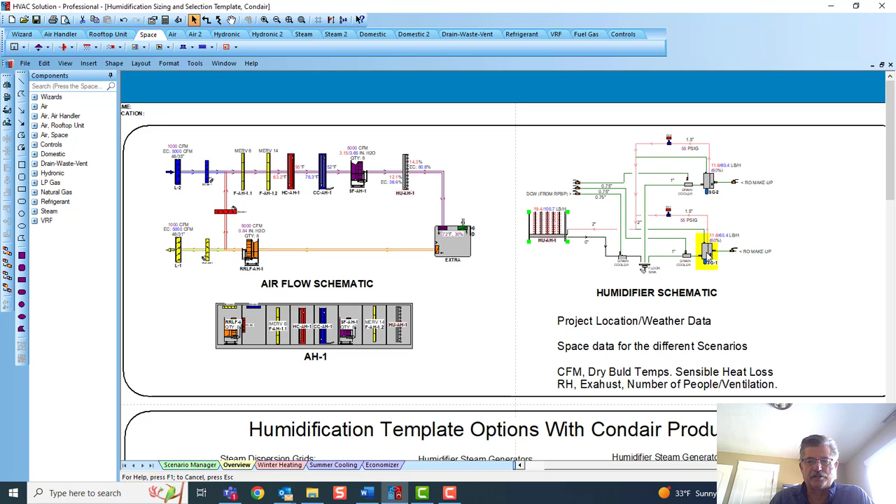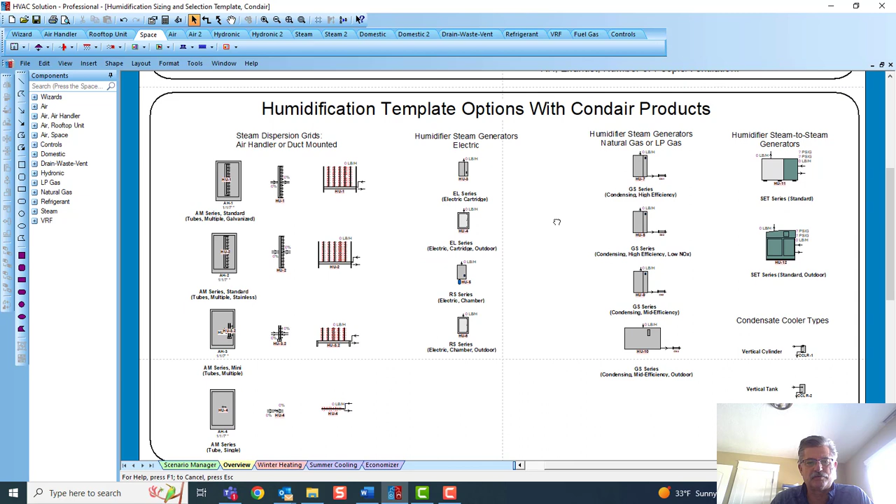Now, all these components right here, let me just scroll up here. We have added humidification template options with Condair products. So you can see we've got their little dispersion grids, the AM series galvanized, and then stainless AM, multiple tubes, and then a single tube. Then obviously there's the component that goes in the airflow, and then the schematic there, the steam schematic.

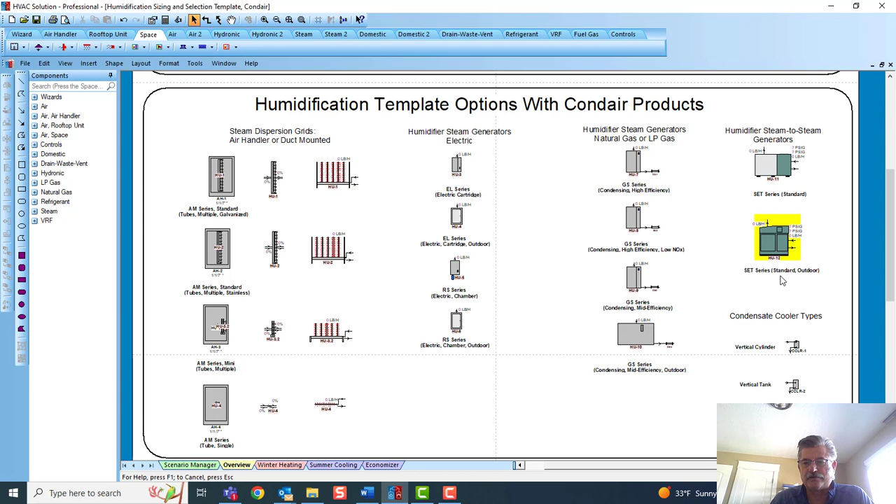Then we also have the humidifier steam generators, the EL series as well as the RS series, and then the natural gas or propane steam generators, GS series there, and then they do have a steam-to-steam generator with the SET series, standard or an outdoor unit. So all these components can be put in the software.

Let's just go to the air. There would be the components, steam. You see there's other types of humidification, pressure washers, Condair, and then there's the dispersion. Then over on the Steam 2 tab is where a lot of the electric or natural gas are, and then right next to that, the Condair steam to steam.

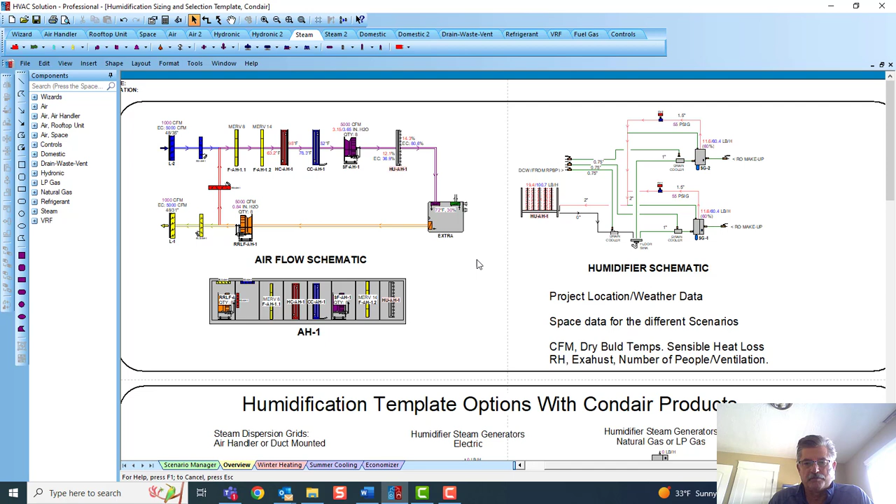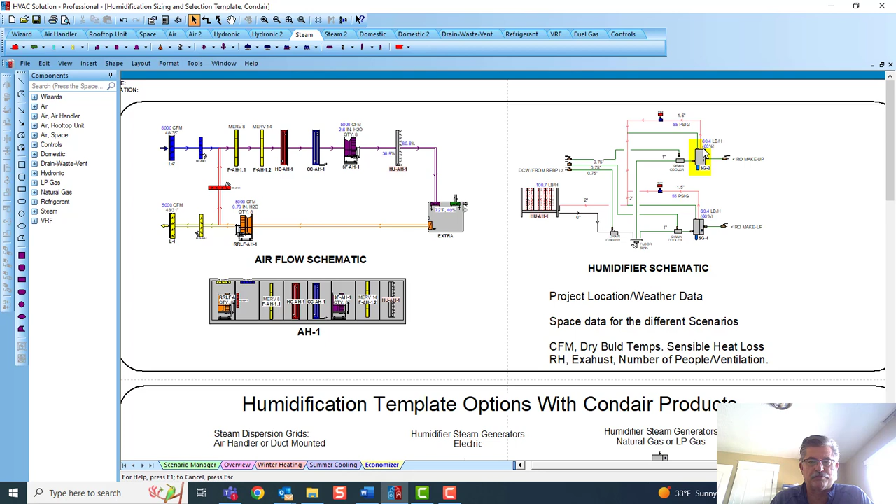So what you need to put in the program, and like I say, this is a template, but you need to put in the project location, which is kind of the weather data. I'm here in St. George, Utah today, the location. And then you also need to put in space data, right? And you'll see we have different scenarios down here: winter heating, summer cooling, then economizer. And you can see as I rotated through those, we had different loads appear.

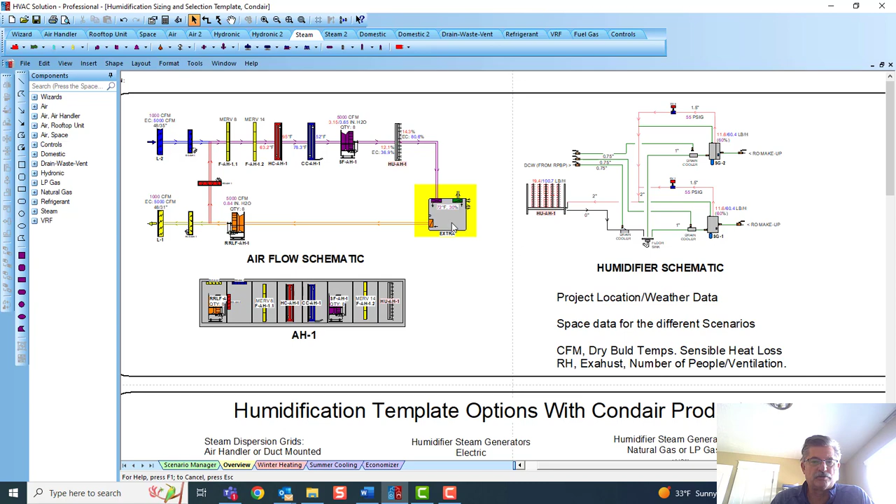So the data that you put in under each scenario, you can put in different CFM, dry bulb, exhaust, ventilation, and you can do that easily by just going into the space. And if you're on the overview tab down here at the bottom, you can go from winter heating to summer cooling to economizer, and you'll see down below the data changes, and you can change that CFM and other related data that's associated with that.

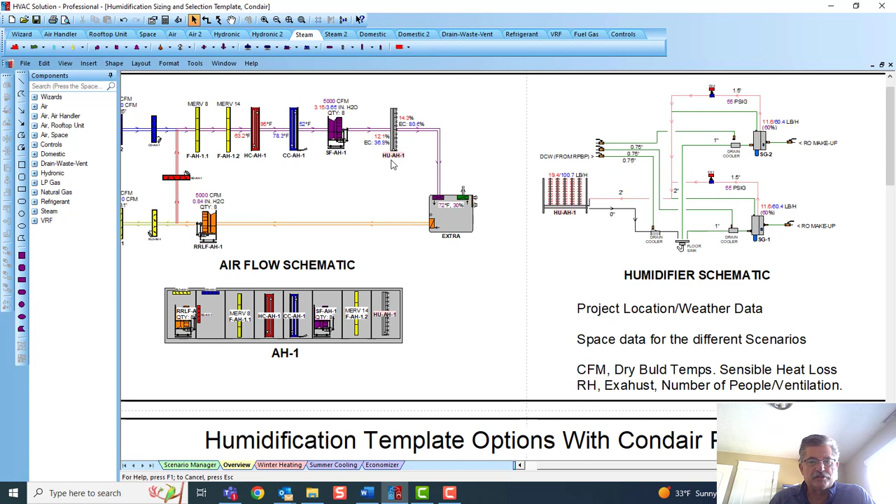So you'll see there's a little pink shading behind the callout. That means I can select the product. So if I hit the thumbs up button, then it'll actually select the product. It's done the calculations based on economizer air 5000 CFM, or the ventilation air under cooling would be 1000 CFM. That would be the heating CFM too on the winter heating.

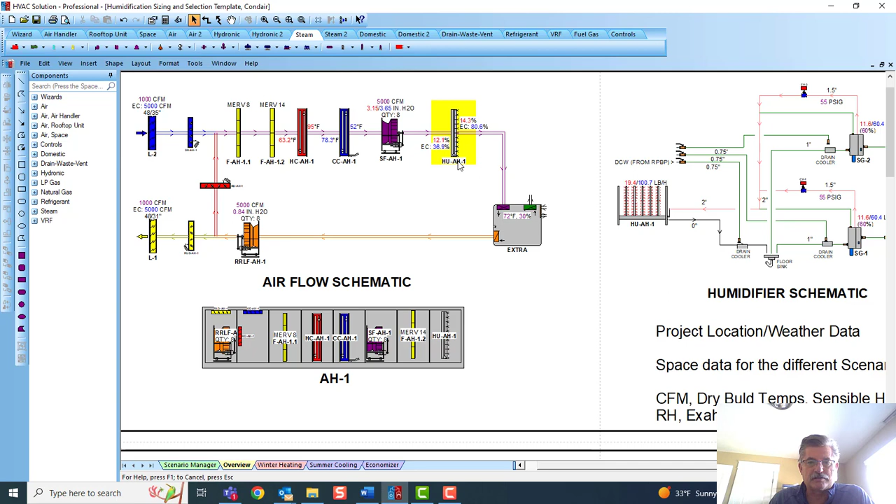So now that it's selected that, I can just click on the humidifier there and go under selection, and then it says which dispersion tube and how much unused capacity. So I could actually go to something else there, the dimensions and weights associated with that. And then associated with that would have been the generator.

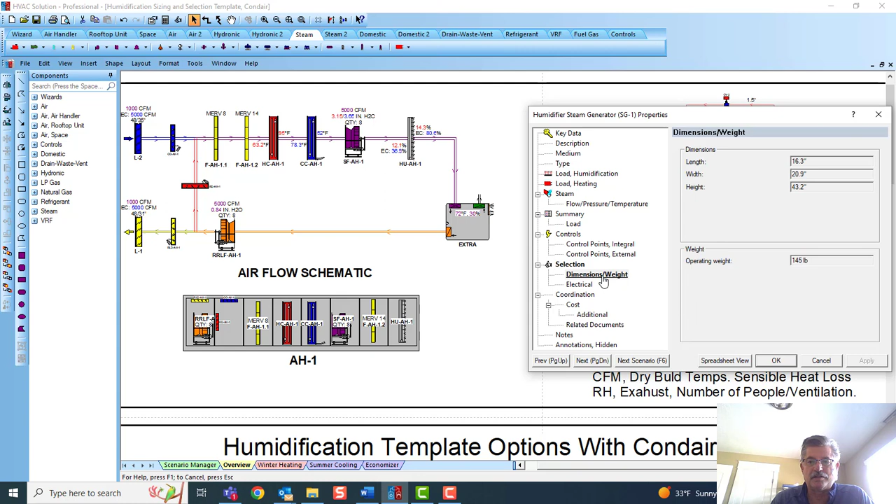This is a humidifier generator, electric. So the RS065 is 4% unused capacity, and the other one would be 36. Once again, dimensions and weights and electrical. All that would be scheduled in the schedules along with the electrical coordination file.

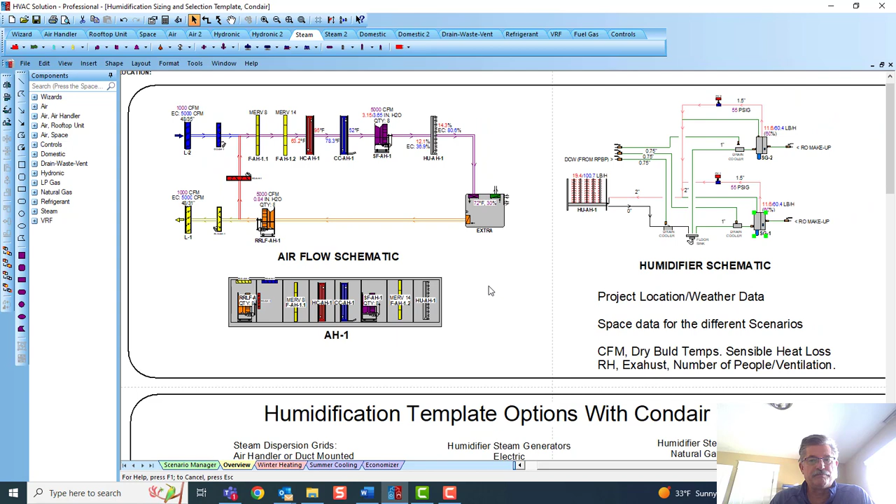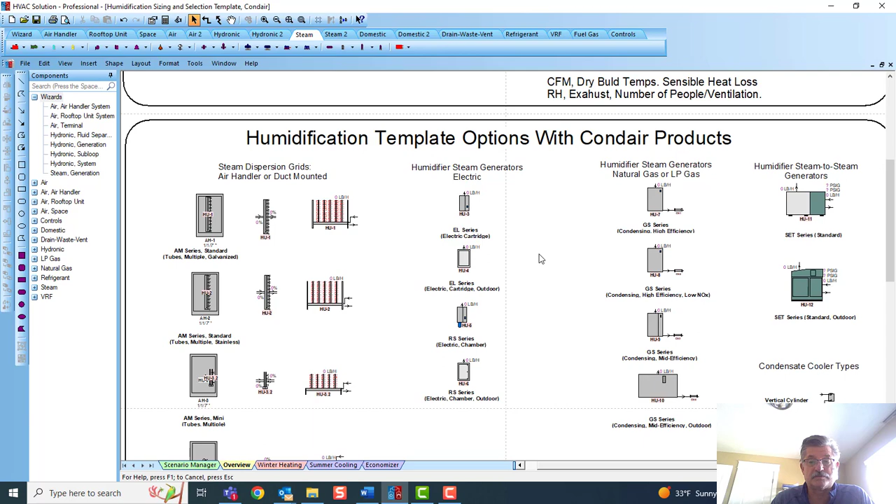Now this system right here can also be created by going to our wizard, either the air handler or the rooftop unit wizard down below here on the project. And once again, if you'd like this, I can just send you this project, and then you can have this to work from as well and build your own templates from this. But here's an example of the rooftop unit that was built with the humidifier in that as well. And then once again, the space data is all put within the space there.

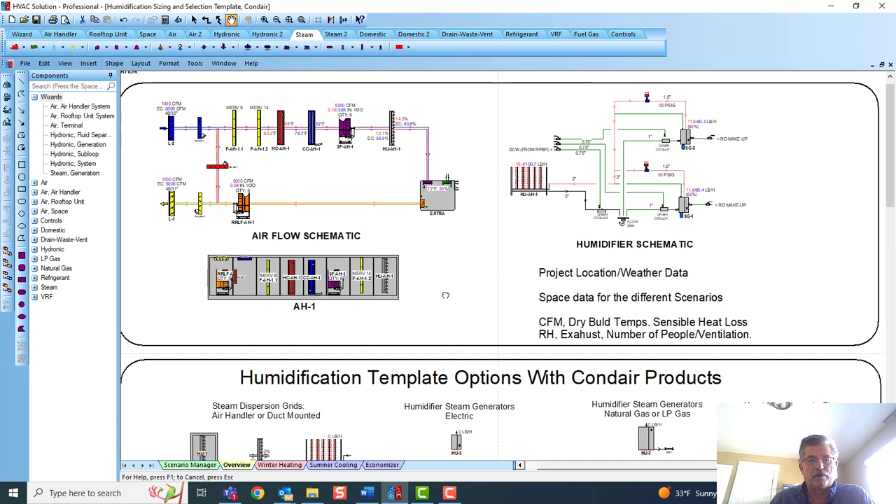So one other thing I'd like to share, and it's not just the humidifier component, but any component you can click on and go under type. So I could switch from the multiple galvanized AM series tube to the single tube. As I do that and hit OK, you'll see the diagram up here, because now there's going to be a single tube in the air handler, and then a smaller one here.

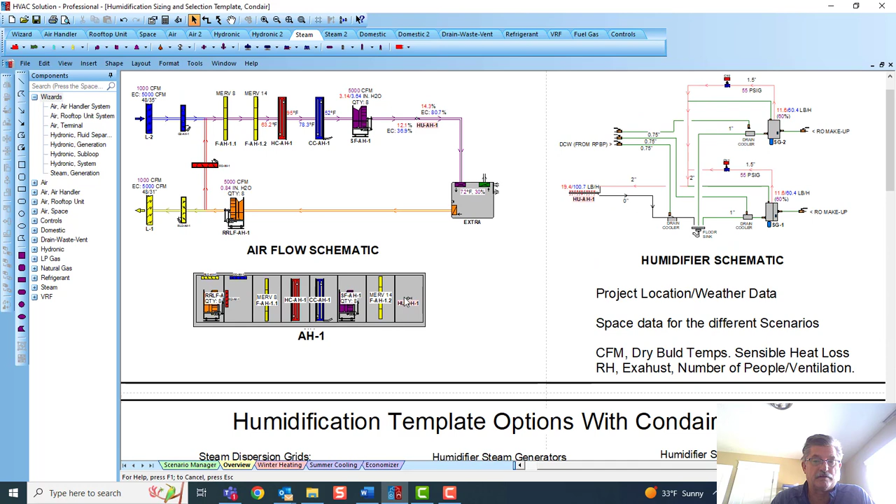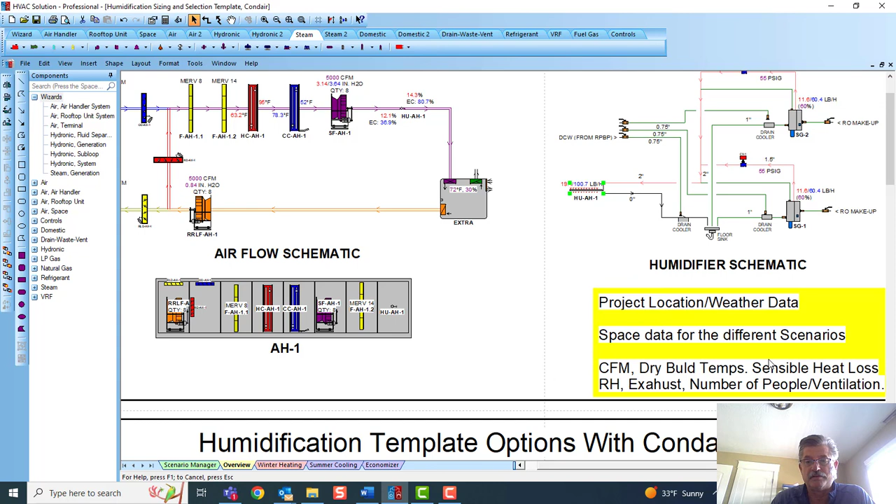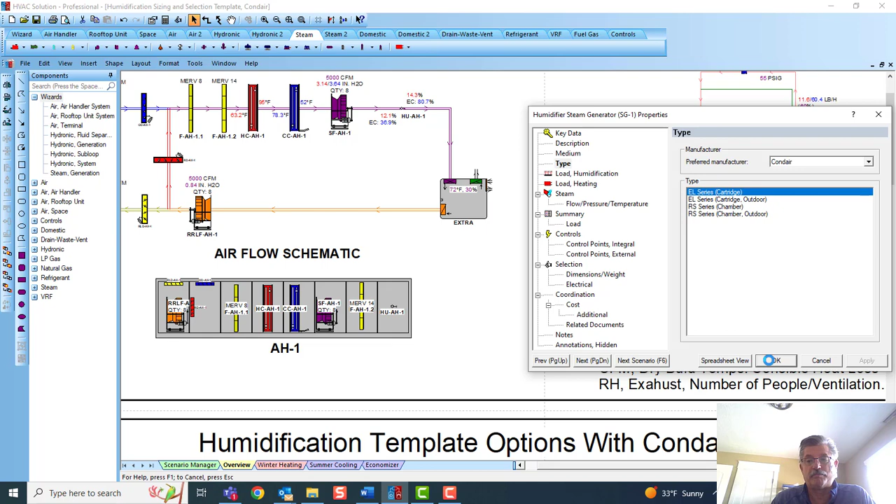Then you'll see the pink shading came on that again. If I hit the thumbs up button and the pink shading goes away, then it's selected that product as well. And once again, you can do that on any component. Going to type, you can see how I could change that fan to a forward curve fan. You can do that with spaces and coils and most all other products in the software.

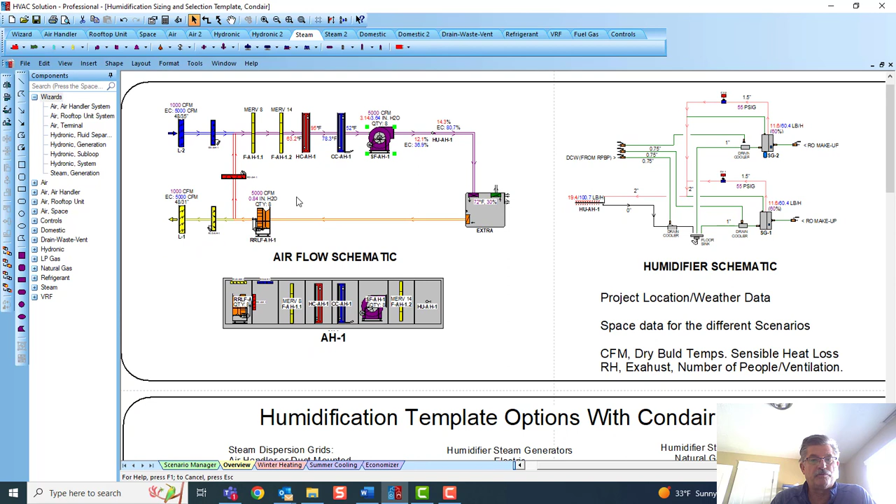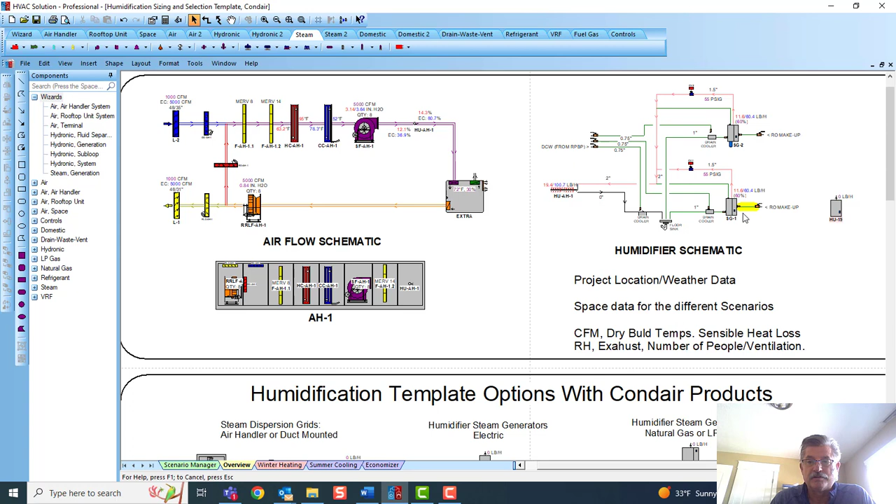Anyway, the intention today was to help you size and select humidifiers within the software HVAC Solution. You can use this template, use our wizards, or just drag and drop components by going to the particular one up there, electric Condair. You'll see there's another one there. You'll see I had these each sized at 60%, so a little bit of redundancy there. You can also search over here on this side and type in humidifiers or Condair and get all the products that are associated with that.